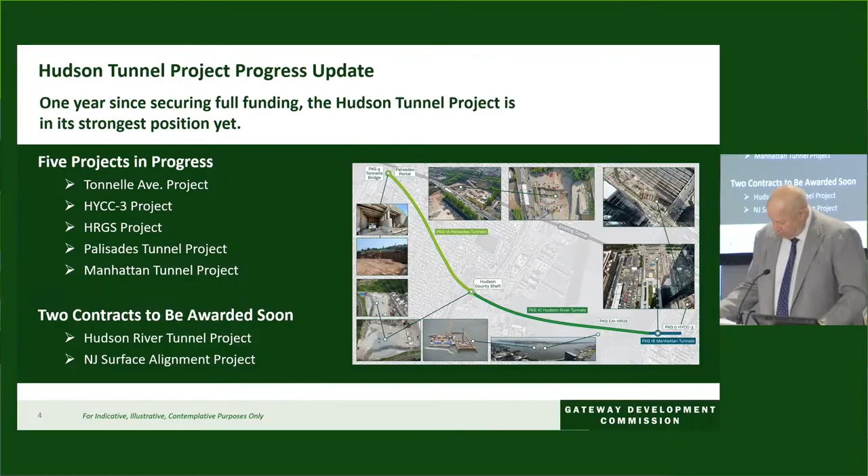I'm proud to say that the Hudson Tunnel project continues to advance on schedule and within budget. We can confidently say that this project is exactly where it needs to be now that we are 2 years into its 15-year construction timeframe. Two projects are more than halfway finished, and we are on track to reach substantial completion of the Tonnelle Avenue project this October. The first set of tunnel boring machines are being built and will arrive next year. Construction is already creating thousands of jobs and driving billions in economic activity. We expect to award one more construction contract by early 2026 and another soon after that.

The Tonnelle Avenue project was the first Hudson Tunnel project construction to break ground, and it is now nearly complete. The project is setting the stage for tunnel boring by building a new roadway bridge that will provide the access point to bring the tunnel boring machine into the new tunnel under the Palisades. The project will also enable construction teams to access staging sites on both sides of the highway without disrupting traffic, which I believe is the second most heavily utilized piece of road infrastructure in the state of New Jersey.

When the tunnel is complete and the work is done as part of this effort, it will enable trains to pass under the Tonnelle Avenue roadway to go into and out of the new tunnel. The team has been building the new bridge in sections so that traffic can continue in both directions during construction. On July 8th, we shifted traffic onto the newly built middle section of the bridge, enabling work to start on the western section. This marked the transition into the final stage of the project.

For the final stage of the project, our team is excavating the eastern side of Tonnelle Avenue to level it with the western side. Once that excavation is done, the concrete work for the final section of the bridge can be built. The contractors on both sides of Tonnelle Avenue are working in very close coordination as we approach the point where the site will be handed off to the Palisades Tunnel team. We are now in the home stretch, and the project will be completed this fall.

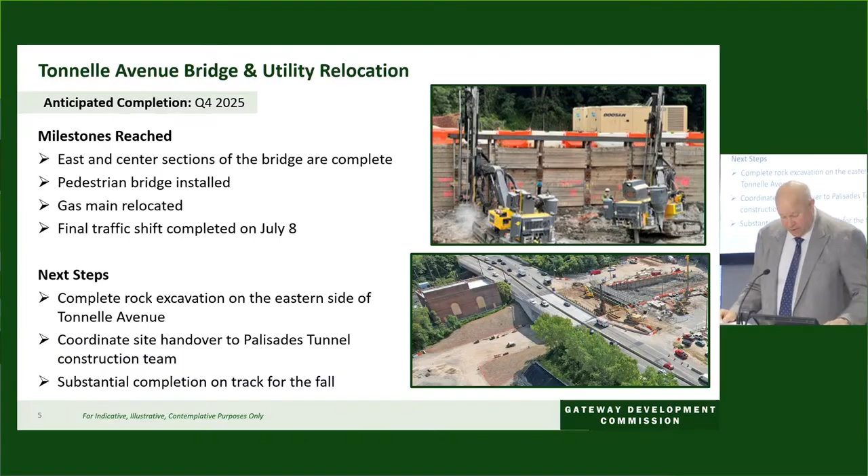Across the Hudson River, we have our second project that is more than 50% complete. It's called the Hudson Yards Concrete Casing Project, Section 3, and it crossed the halfway point in May of this year. HYCC 3 is preserving the rail right-of-way beneath the Hudson Yards so that a new tunnel can connect to the New York Penn Station from the west. Precision is critical here. The concrete casing has to match the elevation of Penn Station at the lower level, and if it is off by even a few inches, the tunnel will not connect.

Excavation and dewatering of the trench that will hold the tunnel box is now in progress. The trench is now 65 feet deep at its deepest point, and when complete, it will be 80 feet deep. The team has removed more than 50,000 tons of soil and more than 2 million gallons of water. To get to this point, the team had to install 337 secant piles to hold up the walls of the trench and create more than 277 columns of stabilized earth using jet grouting. As they excavated the trench, the team installed yellow struts to support the walls, and there are now 64 struts supporting the sides of the trench.

Work is also underway on installing the tiebacks and concrete liner that will hold the walls back while the excavation continues. The next step after excavation and installing the struts will be pouring concrete for the tunnel box. This will be among New York City's largest concrete pours in recent history, and we expect the work to begin later this year.

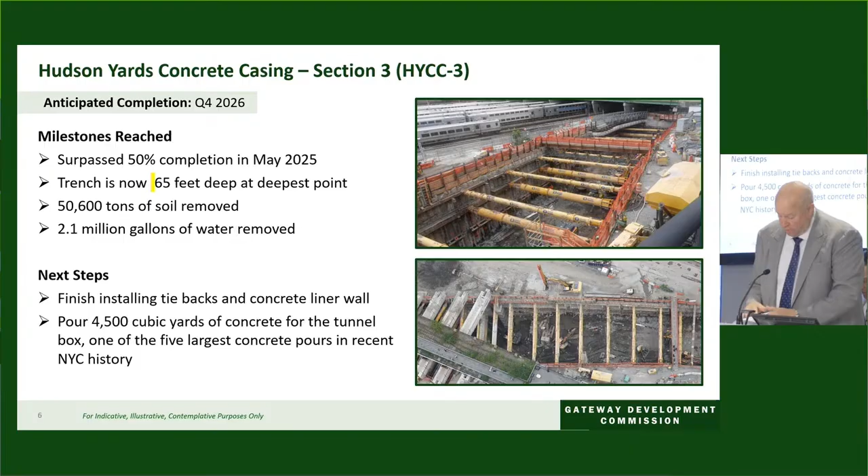In the Hudson River, as you can see when you look out there, is the Hudson River Ground Stabilization Project, which is mixing concrete into the riverbed to create a stable environment for the tunnel boring machines to go through when the tunnel is being constructed.

The team is accomplishing this using a process called deep soil mixing, in which a powerful drill advances a mixing tool as binder slurry is pumped through the connecting drill steel, mixing soil to the target depth. The process constructs soilcrete columns, and so far the team has mixed 248 primary columns, 180 secondary columns, and 42 wedge elements to fill the spaces between the columns.

The end result will be a 1,200-foot long, 100-foot wide lightweight concrete box at the bottom of the Hudson River.

The work area is enclosed within a temporary cofferdam to shield against river currents and protect the river ecosystem during construction. The team has begun moving the mobile wall within the cofferdam further east, and soon work will begin to shift the entire cofferdam toward Manhattan.

Work also recently began to remove a timber pile field from the remnants of Piers 68 and 69 on the west side of Manhattan. To ensure work can move ahead safely, the team dredged the river bottom to remove overburden, a buildup of silt and sediment. This is done to prevent vessels navigating the channels around the work site from getting stuck in the mud.

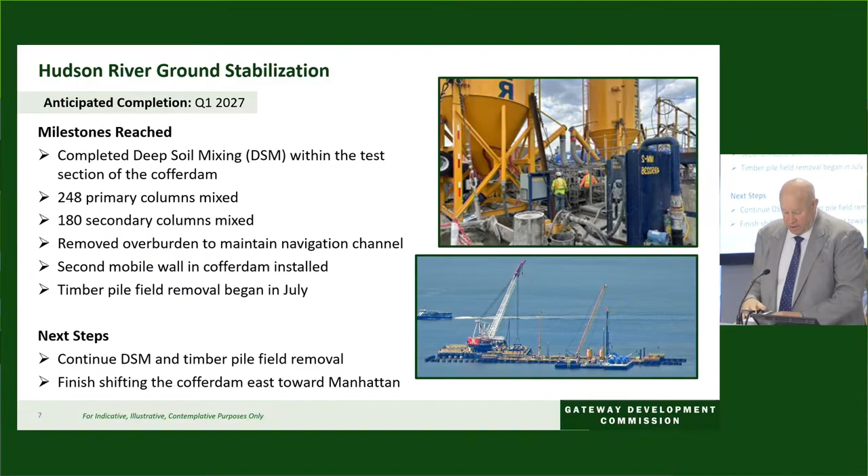Right next to Tonnelle Avenue on the other side of the river going back to New Jersey is the Palisades Tunnel Project team, and they're building a portal where the tunnel boring machines will launch to go east. The tunnel boring machines are being manufactured now and will arrive next year.

They will be shipped in pieces, lowered into place right there at Tonnelle Avenue via steel baskets, and assembled right in front of the cliff face where they will begin digging. They're massive machines: the cutter-head is more than 28 feet in diameter, and the gantry, where all the spoils are taken out, removed, and taken away from the site, will stretch back 500 feet - that's longer than a football field.

The team has built a massive access ramp to enable support of excavation work around the tunnel boring machine launch point, and recently began building the soldier pile wall to prevent the soil from collapsing onto the tunnel portal while they excavate it.

Machines this big also need their own power source. Our team will be installing a substation to power the tunnel boring machines through the Palisades.

The Palisades Tunnel Project also includes building the Hudson County shaft in Weehawken on the other side of the Palisades, that will be used to replace the TBMs that dig through the hard rock that the Palisades consist of.

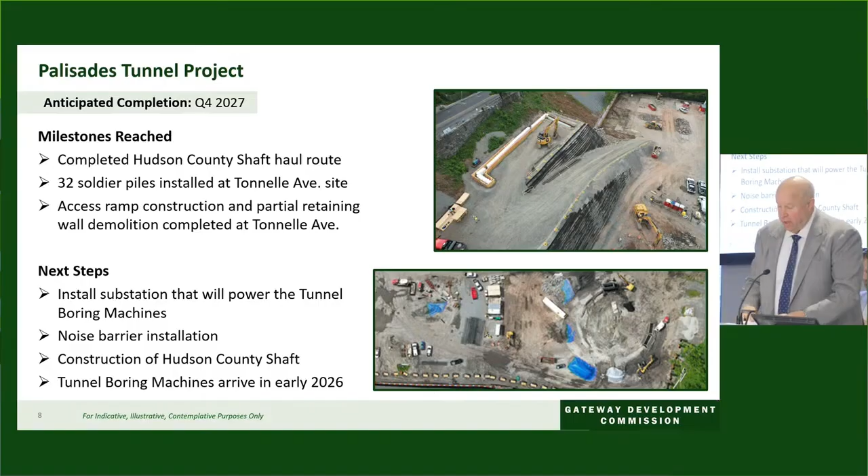The first step in building the shaft is installation of a slurry wall, which forms the perimeter of the shaft, providing structural support. The team is currently installing guide walls to ensure the slurry walls are aligned properly, and we are installing a noise barrier around the construction site because there are residences right there.

Back in Manhattan, work is getting started on the Manhattan Tunnel Project across the street from the Hudson Yards concrete casing project. This project is building the portion of the tunnel from the Manhattan bulkhead at the river's edge to the western limits of the Hudson Yards concrete casing.

Although the project is only building 700 feet of tunnel, it is one of the most complicated construction packages, due to the presence of historic fill along Manhattan's western shore, as well as active sewer and utility lines. The Manhattan Tunnel Project requires careful planning and precise execution in terms of construction.

We awarded the contract for this project this past February, and construction activities started this spring. The work to date has involved surveying and test pit excavations to understand the below-ground conditions, along with ground stabilization to prepare for excavation. Soon the team will begin building the 12th Avenue shaft.

This is a shaft much like the one on the Weehawken side, but this will be on the Manhattan side, and will be constructed the same way, with slurry walls that will form the basis of the sides of the shaft. Constructing the slurry walls will require our team to also build a temporary water treatment plant on Block 675 to support that work.

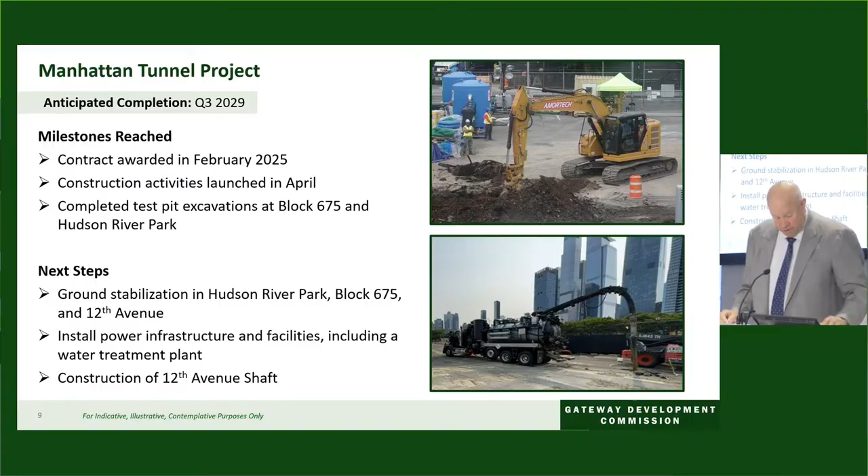That concludes the presentation in terms of the status of the project.

This is one of the most urgent passenger rail projects in the country, and it requires the best of the best, as somebody has already been quoted as saying. I'm thrilled to announce that Jim Starace will be joining the GDC team as Chief of Program Delivery in August.

Jim brings over 40 years of experience delivering large-scale transit projects in the New York, New Jersey region. As Chief of Program Delivery, he will oversee all aspects of remaining design and engineering, construction, interface management, and other technical work areas. He will also work closely with GDC's partners to identify and proactively mitigate risks that could impact the project schedule or budget.

Hamed Nejad, who has been serving as Acting Chief Technical Officer since September of 2024, will move into the role of Chief Engineer of GDC.

Hamed has been an incredible asset to the GDC team. During his time as Acting Chief Technical Officer, he has overseen work to advance the Hudson Tunnel Project construction projects past the halfway point, the start of the first tunnel boring project, and the award of the largest Hudson Tunnel Project construction contract to date.

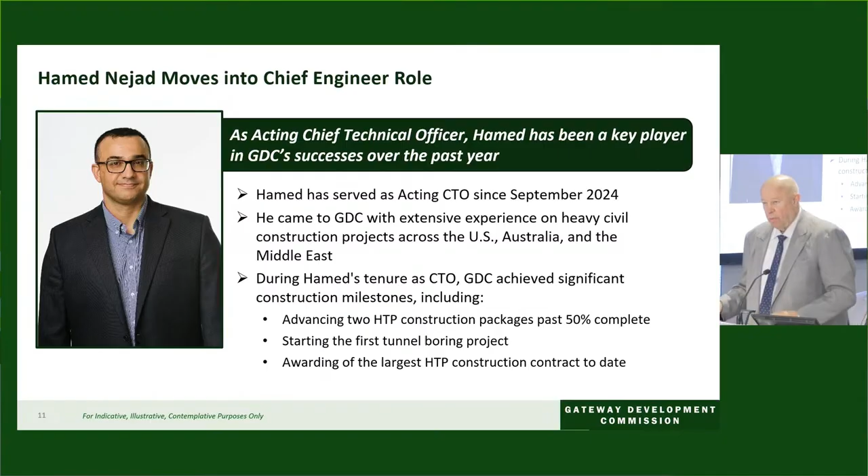That concludes the presentation and the introduction of the two new employees—one new employee and one promotion of an employee to a new role. Thank you very much.

Thank you, Tom, very much for that update.

Prior to finishing the remainder of the agenda for today's meeting, I would like to make a motion to enter into executive session to discuss internal matters, contract negotiations, personnel matters, and matters in which the release of information could impair a right to receive funds from the United States. After the executive session, the board will reconvene to finish the balance of the agenda, and then we will conclude the meeting appropriately.

I would like to make a motion to enter into executive session to discuss internal matters, contract negotiations, personnel matters, and matters in which the release of information could impair a right to receive funds from the United States or other grantor.

May I have a motion? I made the motion. May I have a second? Second, Lisha. Any discussion? All in favor? Aye. Any opposed? Motion carried. We will now go into executive session.

Thank you very much.

We are returning from executive session, and we are going to continue our agenda and turn to the GDC staff for a presentation of the action items. Tom.

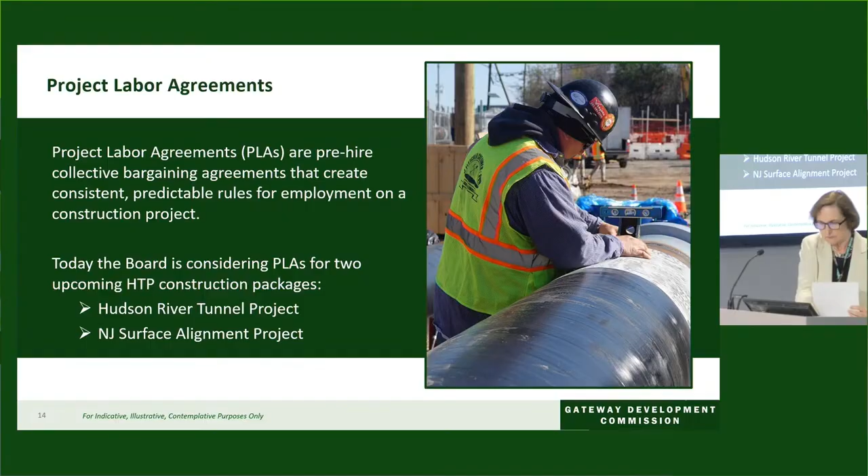The first item for the board's consideration today is entitled the authorization of award of contract GDC 25-028-OP for site security services to support the Hudson Tunnel project. Do any of the commissioners wish to comment?